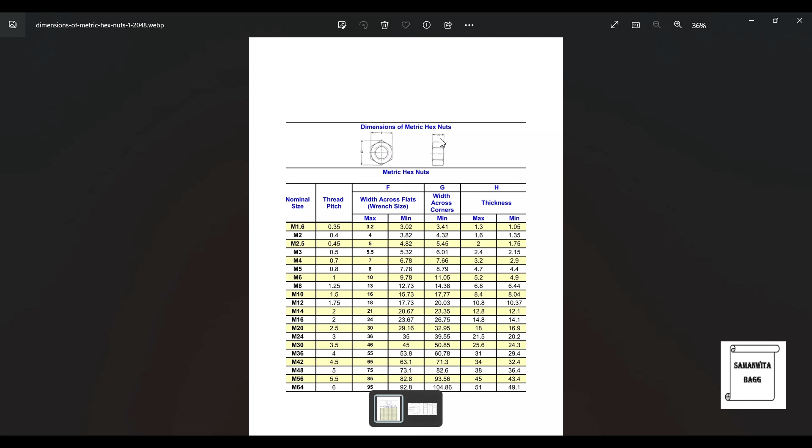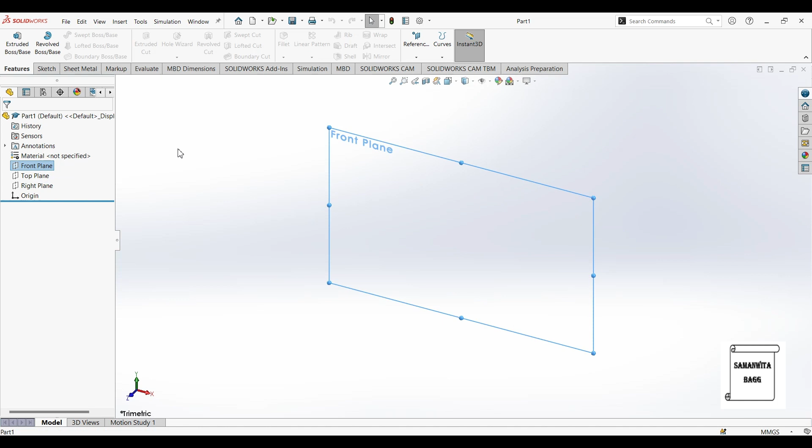So we will go to SolidWorks first and click on new. We'll select part and click on OK. We'll first choose front plane and click normal to. Next I'll go to sketch and I'll choose polygon. Once this is done, I'll go to smart dimension and I'll give the diameter here as 13, as we discussed.

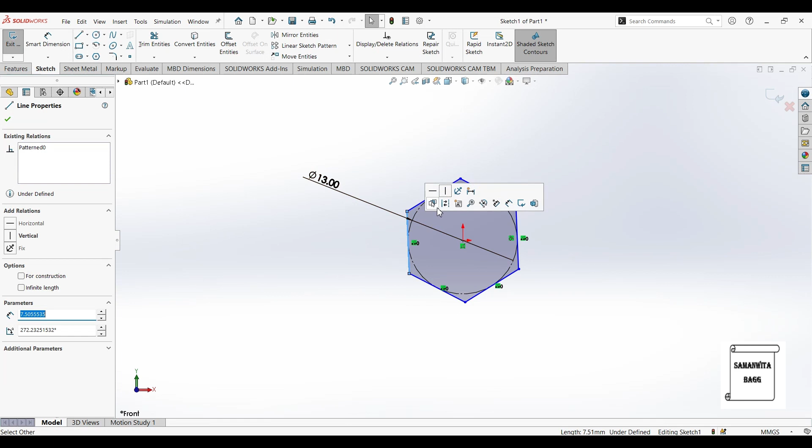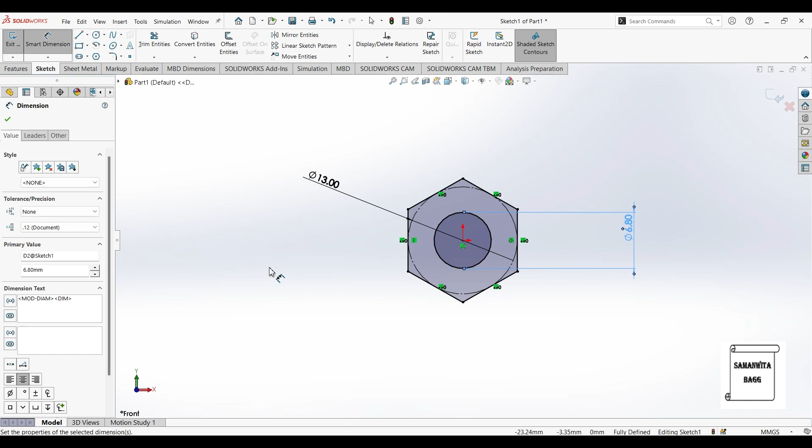Also, I want to make this side vertical. I'll just click on it and click on make vertical. So once you make it vertical, this becomes a fully defined sketch, which is in black color. Now I want to enter a circle inside over here. I'll give the dimension to it. This is 6.8 mm. Once this is done, I'll come out of dimensioning and exit from here at the top left corner.

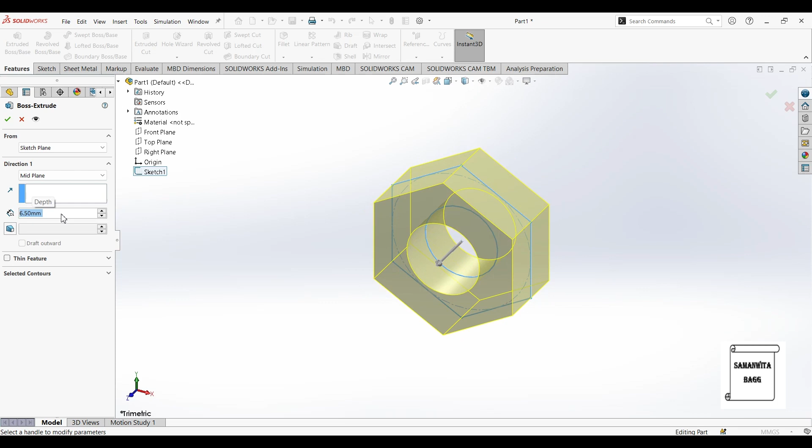Now I want to go to features and I want to extrude this shape that I have created. For selecting, I'll go to this arrow here and I can click on sketch 1. So this is selected. And I'll change the direction from blind to mid plane. And I'll give the depth of the extrusion, that is 6.5. I'll click on OK now.

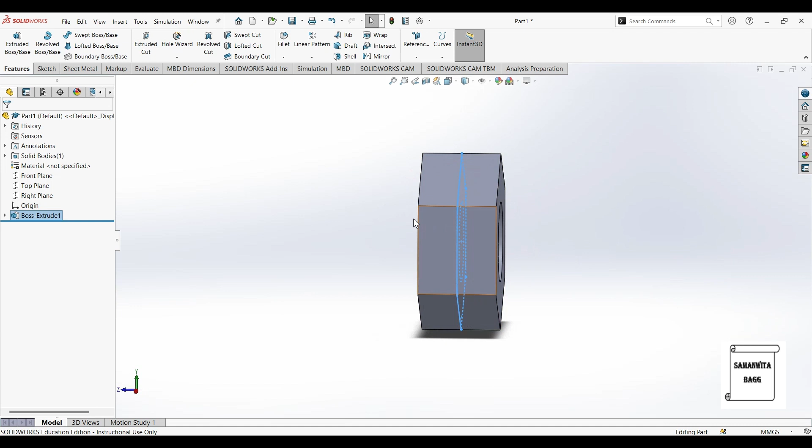So once the extrude is done, now I want to create this chamfer on this face. Previously, we had just made a circle and gone for extrude cut. This internal circle was the reference. Now I'll show you another way of creating that chamfer. For that, I'll first go to right plane and normal to. I'll select this side. Now I'll go to sketch and I'll choose line from here and I'll draw a particular shape of a triangle. So this is what I create.

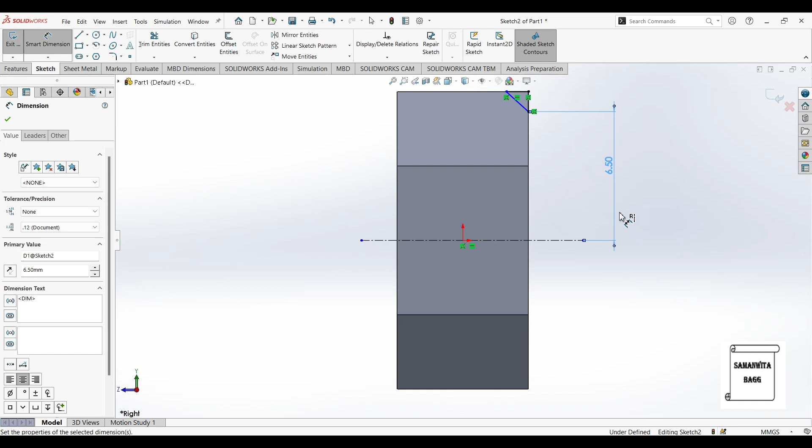Next I'll choose center line and along the center I'll draw a line. You can click on escape such that you are out of this line, otherwise it will continue like a polyline. So now I'll go to smart dimension, I'll click on this point on this line. This dimension is 6.5, that is half of the diameter that I have taken. I'll get the angle between this line and this line. This will be 30 degree. In the previous case when we were extruding, we had given a draft of 60 degree. Here it is 30 degree, half of it.

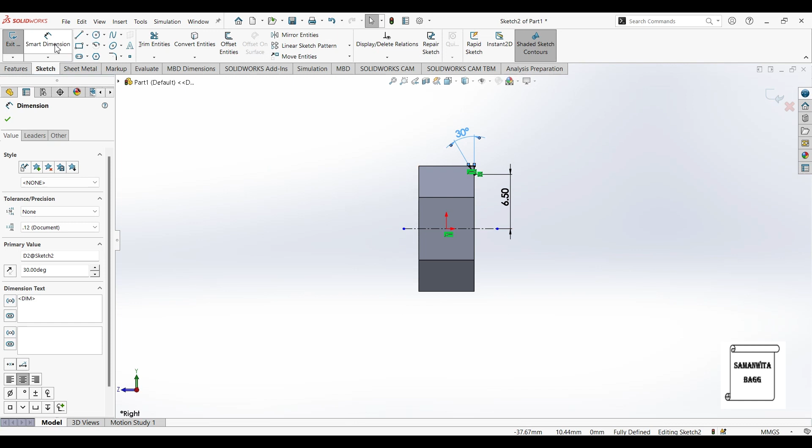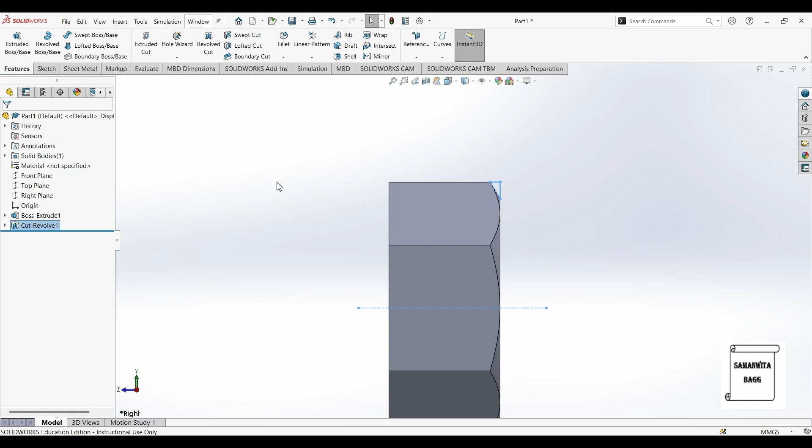Dimensioning is also done. Now I'll exit this and I'll go to features. Next we'll go to revolved cut. I'll select the sketch 2. The direction is blind and the angle is 360 degree. I'll click on OK. So you can see here the chamfer has been created. Now I just want to replicate this on the other end.

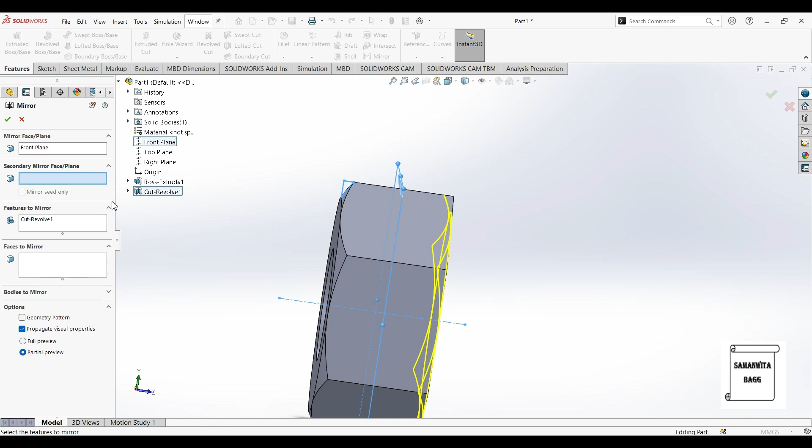So I will go to the mirror option. It is asking the mirror face or the plane. So I am going to choose the plane as the front plane. You can see here, this is how it is going to be mirrored, and I'll click on OK. So this is done.

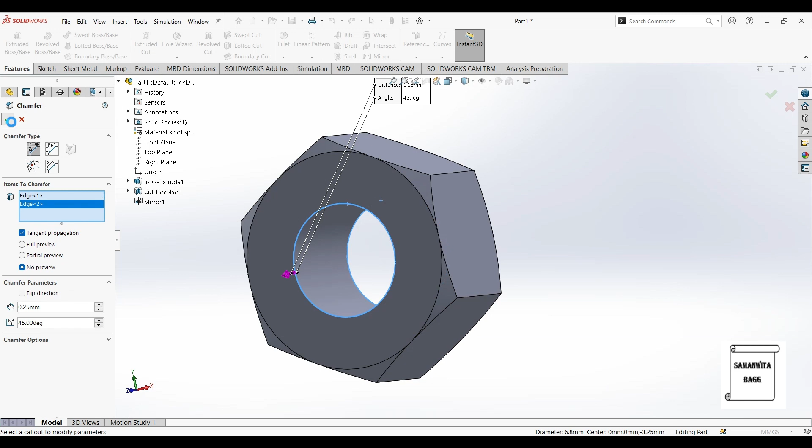Next, I want to create chamfer here. So I'll go to fillet and select chamfer. I'll select this edge, this edge and the edge here. Now this dimension is what I need to change. So it is 0.25 mm. Angle is 45 degree. So you can see your chamfer has been created.

And the final thing which we want to always create is a thread in the nut. So I'll go to insert, annotations, cosmetic thread. Let's select the edge, up to next. And this has been automatically selected as 7.8. If you want, you can change this to say 10 and click on OK. So you can see here threading has been done.

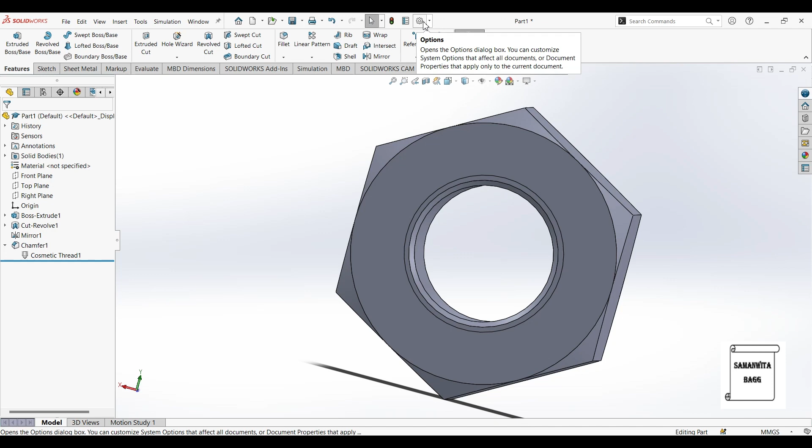Now I'll just go to this option of cosmetic thread. I'll edit this feature of cosmetic thread and let me give this as 7.8 itself, and you will see it is done over here. Now you cannot see the cosmetic thread unless you show the option. So you just go to this last thing here and click on options. Go to document properties, detailing, and check this option of shaded cosmetic threads, which was not highlighted.

Click on OK. So you can see here the cosmetic thread has been now transformed into a proper view of a threading. Now this is not the threading that has been created, it is just a view that you get to see, such that you are able to imagine how it would look when the nut has been made.

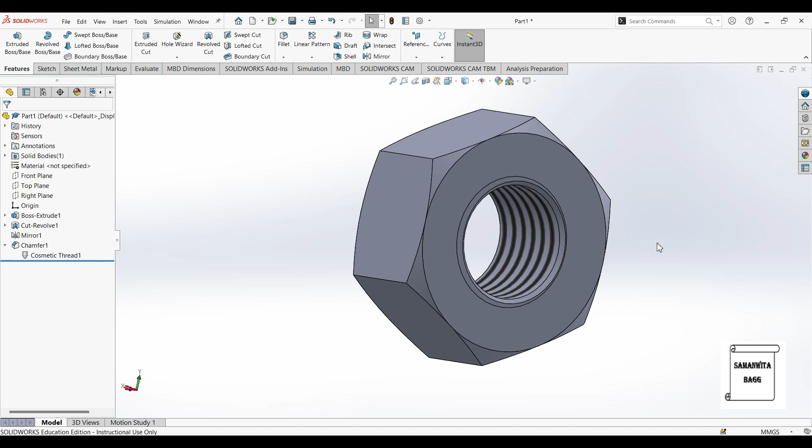So this completes the hexagonal nut design of size M8 with a different pattern of creating this chamfer rather than the one which we had used. You can also use the previous option that we have used. It will give you the same results. It is just another way of creating the nut.